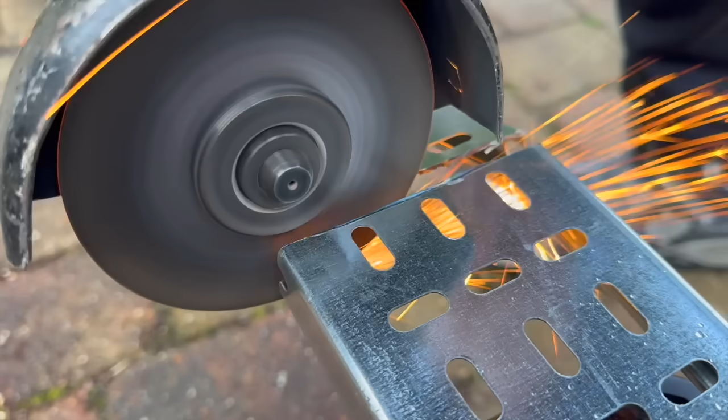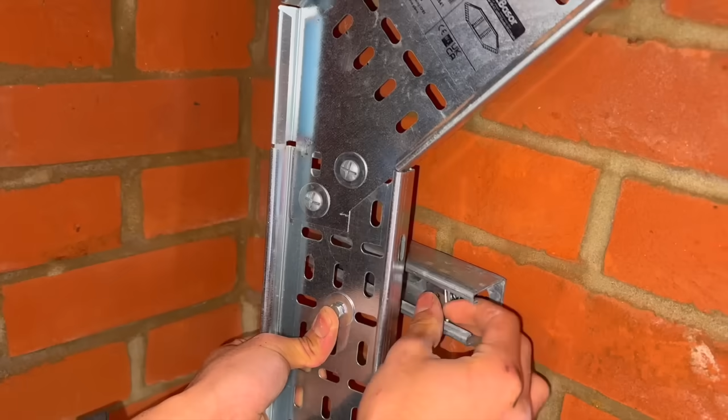Most electricians think cable tray is perforated so you can put cable ties through it. That's wrong. By the end of this video, you'll know the real reason and it will change how you think about every cable run you install. Today, we're taking a deep dive into cable tray, cable basket and cable ladder. What each one's actually for, where you'd use it, and the manufacturer's data that keeps you out of trouble.

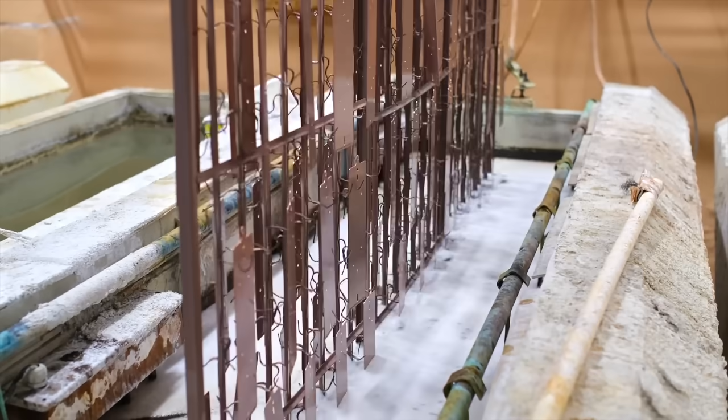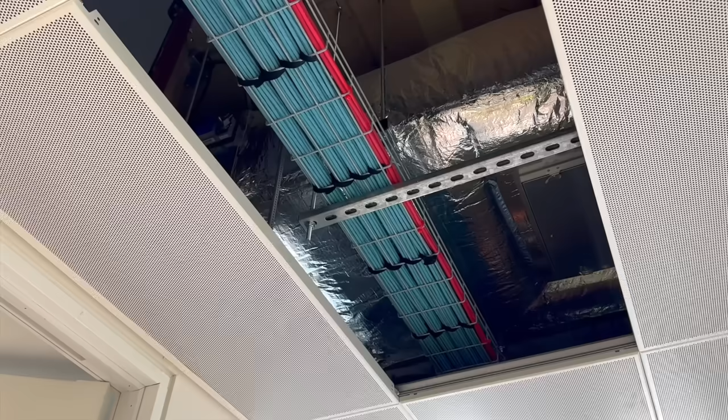One of the reasons cable tray has been so widely used is because of its versatility and that it can be supported in several different ways depending on the building and the application. In a corridor or plant room, you may find tray mounted directly to the wall using cantilever brackets. Above a suspended ceiling, it may be suspended from threaded rod using a trapeze arrangement. In industrial environments, it may be mounted directly to steelwork. And in most bougie coffee shops, you'll normally find it exposed for the whole world to see.

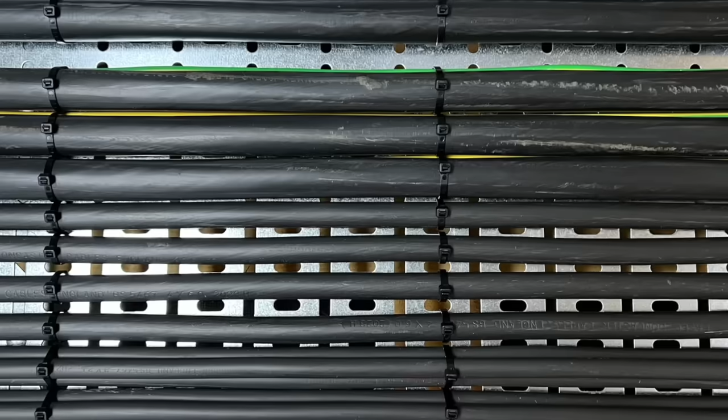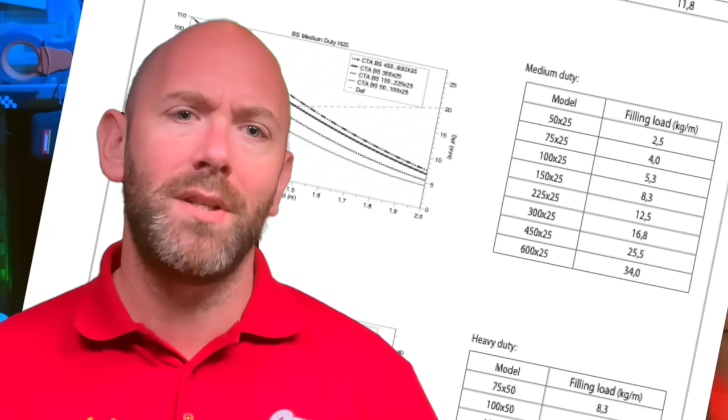The containment itself is only one part of the installation. The support system is equally important, and that's why we have to think about loading. When people first look at a cable tray datasheet, they tend to focus on the width. How many cables can I physically fit onto it? But manufacturers are more interested in something else: how much weight that tray can support. Let's take a 150mm medium duty tray as an example. If we look at the manufacturer's data, it has a published filling load of 5.3 kilograms per meter. At first glance, that doesn't sound like much, but what does it actually mean?

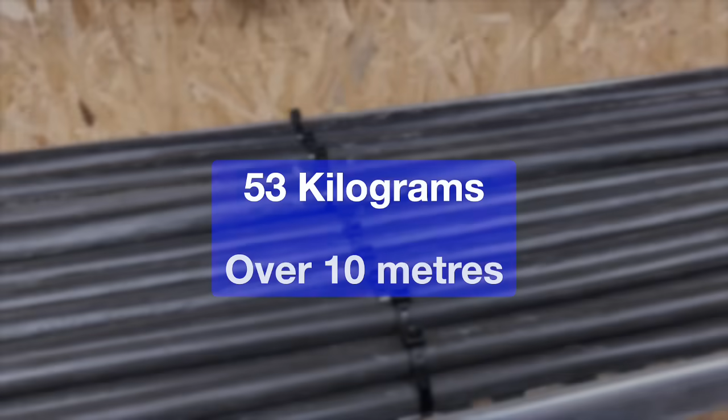Imagine we install 10 meters of that tray. The tray itself is now capable of supporting approximately 53 kilograms of cable load distributed along that length. Now let's put some real cables onto it. A typical 4-core 25mm squared steel wire armoured weighs somewhere around 1.9 kilograms per meter, depending on the manufacturer. If we install 2 of those cables, we've already used about 3.8 kilograms of our available 5.3 kilograms per meter. Add another one and we're at 5.7 kilograms per meter. We've exceeded the published filling load of that tray. Suddenly the loading figure starts to become very relevant.

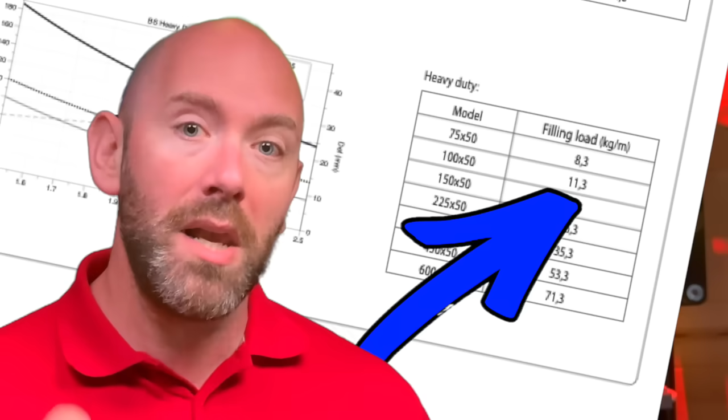Now let's compare that with a heavy duty version of the same 100mm tray. The width hasn't changed, the tray is still 100mm wide, but the filling load increases to 11.3 kilograms per meter. The same tray width can now support almost twice the cable weight. That extra capacity comes from the changes to the profile of the tray itself. The side flanges are deeper and the construction is stronger, allowing it to resist bending under greater loads.

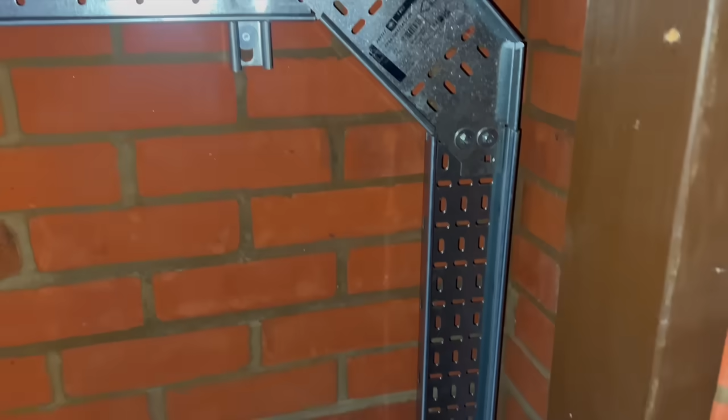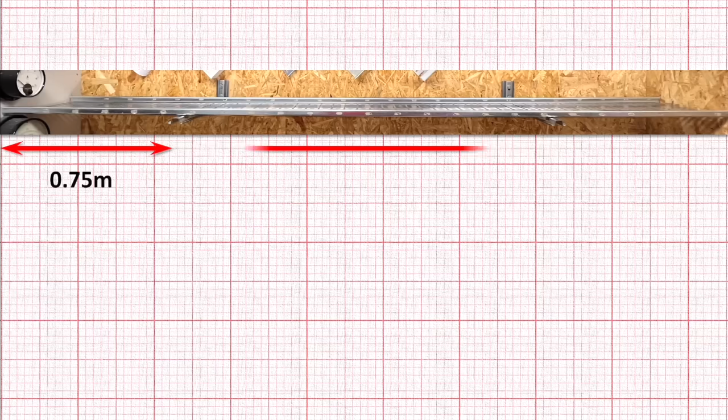But loading is only part of the story. The support spacings matter just as much. Imagine placing 2 ladders on the floor and laying a scaffold board between them. Move the ladders closer together and the board feels solid. Move them further apart and the board starts to flex. Cable tray behaves in exactly the same way. As the distance between the supports increases, the bending force increases. The tray deflects more and the carrying capability reduces. This is why manufacturers publish load information alongside support recommendations.

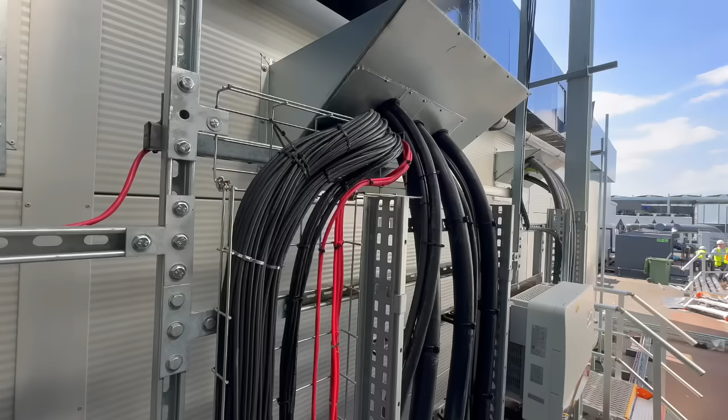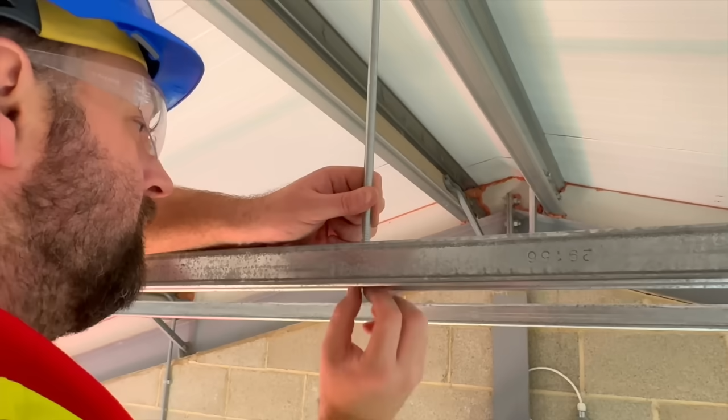And when you start looking at larger installations carrying multiple submains, distribution circuits and large steel wire armoured cables, understanding those loading figures becomes essential rather than optional. What often catches people out is that the tray might not be the limiting factor at all. The bracket may reach its limits first, the threaded rod might reach its limit first, or the fixing anchoring everything back to the structure may become the weakest point in that installation. So when we talk about containment loading, we're really talking about the entire support system working together. Now while we're looking at the tray itself, there is another detail worth mentioning: the perforations.

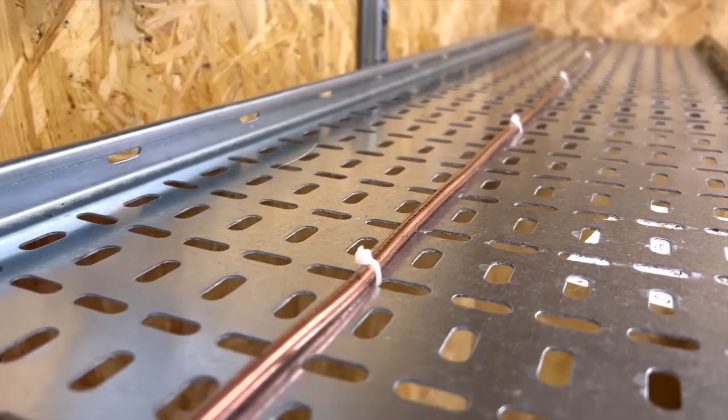Most people assume those holes are there simply for cable ties, and while they are very handy for that purpose, that's not exactly why they exist. We'll come back to those a little later because their real purpose tells us quite a lot about how cable tray is engineered.

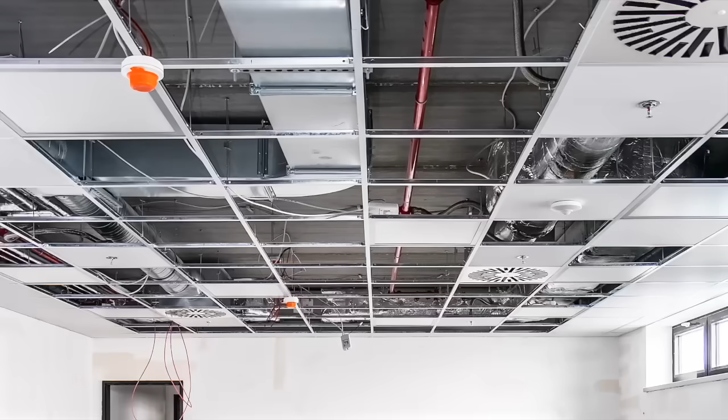You're on a job where the design changes every fortnight. Rooms move, services shift, and that's where basket wins. Not because it's stronger, but because it was engineered for exactly that chaos.

Now at first glance, cable basket looks like a lighter version of cable tray. Both support cables, both can be mounted on walls, ceilings and steelwork. Both can be suspended on threaded rod or trapeze systems, and both are commonly found in commercial and industrial buildings. But basket was designed with a different objective in mind. Where tray evolved around providing a continuous support surface for cables, basket evolved around installation speed and flexibility.

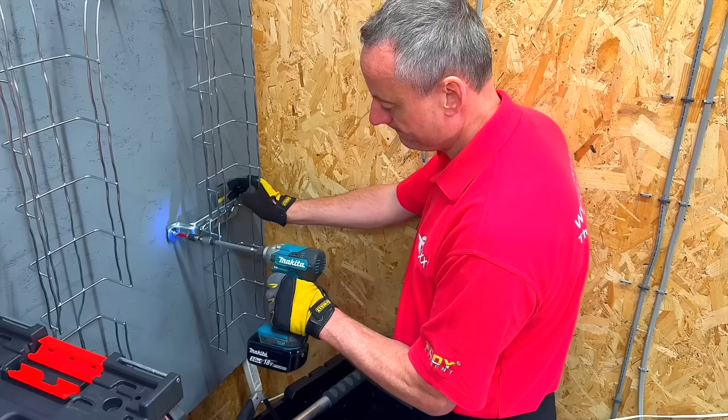You can see that immediately in the construction. Rather than a solid perforated base, basket uses a welded steel wire structure. That open structure brings several advantages. The first is speed of installation. If you've ever worked with basket on site, you'll know that it can often be cut, shaped and modified without needing a large range of dedicated fixings.

Changes in direction can frequently be formed directly from the basket itself. Drops into panels can be created on site. Tees and offsets can often be produced from a straight section. That flexibility in basket makes it particularly attractive in environments where layouts change regularly.

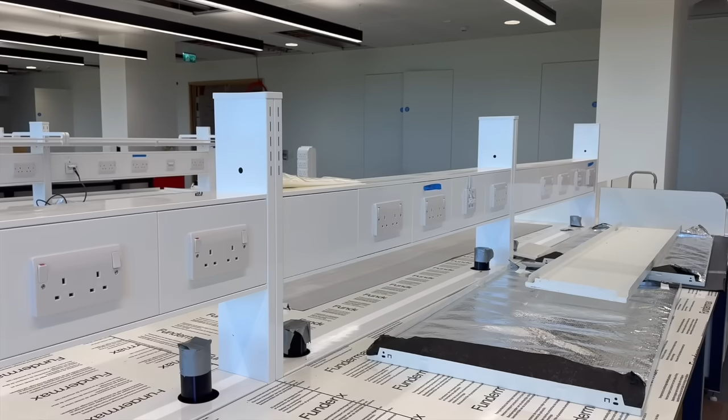Office fit-outs are a good example. The building may be reconfigured several times throughout its life. Departments move, new desks appear, additional data points are installed, security systems are upgraded. In those situations, the containment needs to be adaptable, and basket allows additional cables to be installed, removed, or rerouted with relatively little disruption.

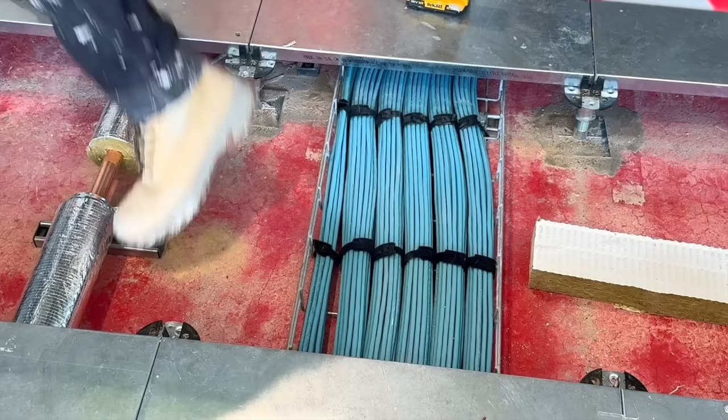The open wire structure also makes visual inspection much easier. You can immediately see what is installed and where it is going. Ventilation around the cable is also improved because the cables are not sitting on a continuous steel base. That doesn't necessarily mean the cables will carry more current, as current carrying capacity is determined by several factors, but it does mean heat can dissipate more freely around the cable installation.

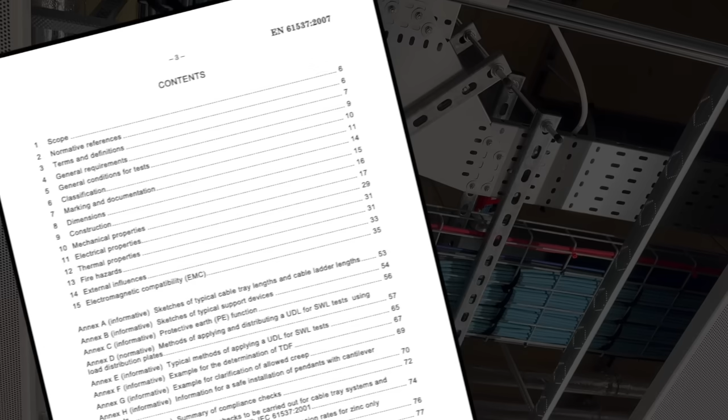Now, one assumption that is often made is that basket must be weaker than tray, but once we start looking at the manufacturer's data, things become more interesting. Just like tray, basket systems are designed and tested in accordance with recognized standards and are supplied with loading information and support span recommendations. If we take a typical 100mm wide by 65mm deep basket as an example, the published load carrying capability changes significantly depending on the support spacing.

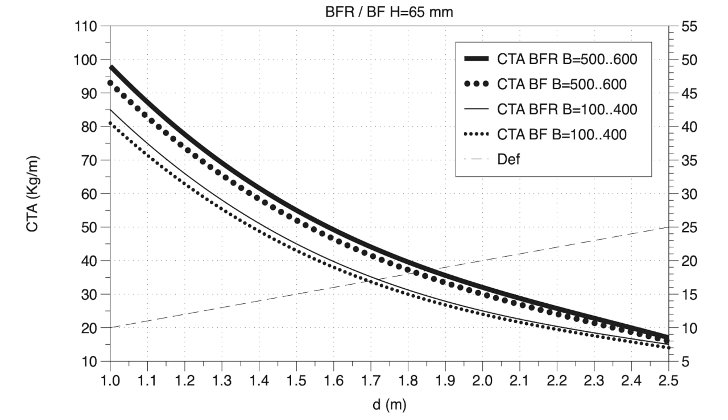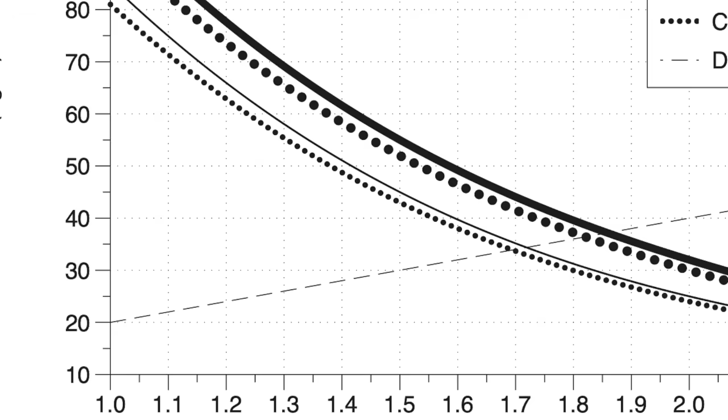At support centers of approximately 1 meter, the basket can support close to 90 kilograms per meter. Increase the support spacings towards 2 meters and that figure falls to around 30 kilograms per meter. The basket hasn't changed, the steel hasn't changed, the width hasn't changed. The only thing that has changed is that distance between the supports.

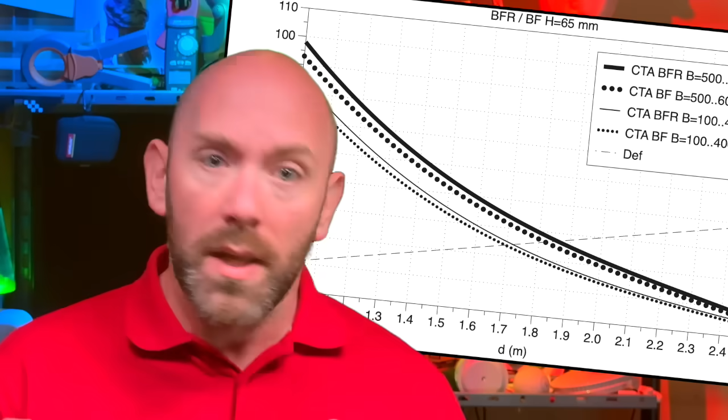This illustrates an important point that applies to all containment systems. The loading figure and the support span are linked together. This is why manufacturers publish graphs and loading tables rather than a single headline figure. But they do highlight an important fact. Basket is not simply a lightweight alternative to tray. It is a fully engineered containment system with its own design criteria.

Where basket can begin to lose ground is where we start introducing large quantities of heavy power cables, multiple steel-wired armoured submains, large distribution circuits, industrial power installations.

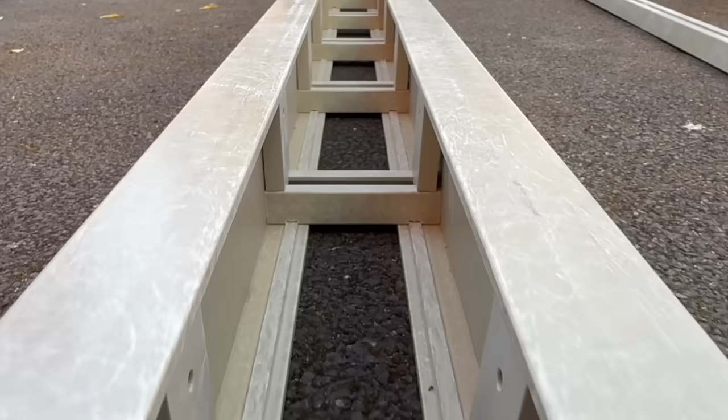Cable ladder is where containment starts to become a structural support system rather than simply a method of routing cables. If you walk through a modern office building, you'll often find basket carrying data cabling and small power circuits because flexibility and future modifications are usually the priority.

Walk through a factory, a data center, a power station, or a large industrial installation, and the priorities start to change. The cable size increases, the cable weights increase, the distances increase. And very quickly, the challenge becomes one of supporting substantial loads safely over long spans. That's exactly why ladder was developed.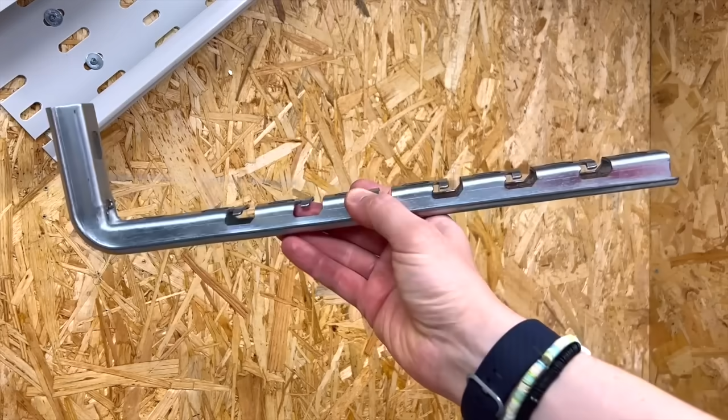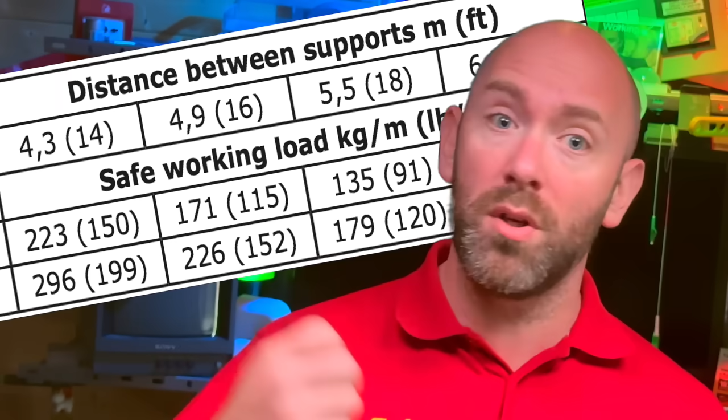The easiest way to understand the difference is to look at the support distances. When we discussed basket, we were looking at support centers typically around 1 to 2 meters apart. With ladder, those distances become much larger. If we take a typical ladder with a 125mm side rail, it can support 223 kilograms per meter with support centers spaced 4.3 meters apart. Increase the side rail height to 150 millimeters and that rises to 296 kilograms per meter.

Think about what that actually means. A 10-meter run of ladder could be supporting well over 2 tons of cable load while only requiring support points every 4 meters. That is a completely different engineering problem from supporting a handful of circuits above a suspended ceiling.

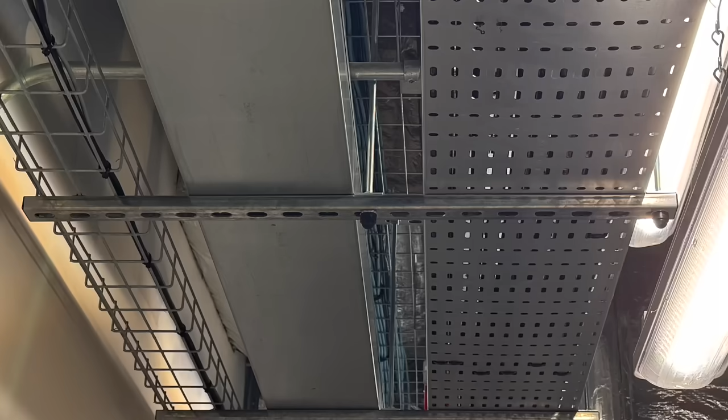Unlike tray, which spreads materials across the base, ladder concentrates its strength into the side rails. Those side rails do most of the structural work, while the rungs support the cable at regular intervals. The result is a containment system that is both strong and relatively efficient in terms of material usage. Another benefit is ventilation. The open rung design allows air to circulate freely around the cable, and that becomes increasingly useful as cable sizes and currents increase because larger cables inevitably generate more heat.

But by now you do know the drill. Loading and span are married. What changes on ladder is the scale of the consequence when you get it wrong. The brackets, steelwork, threaded rod and fixings all become part of that design calculation. If any one of those components is undersized, it can become the limiting factor regardless of how strong the ladder itself might be. The environment also starts to become more important as installations become larger and more exposed.

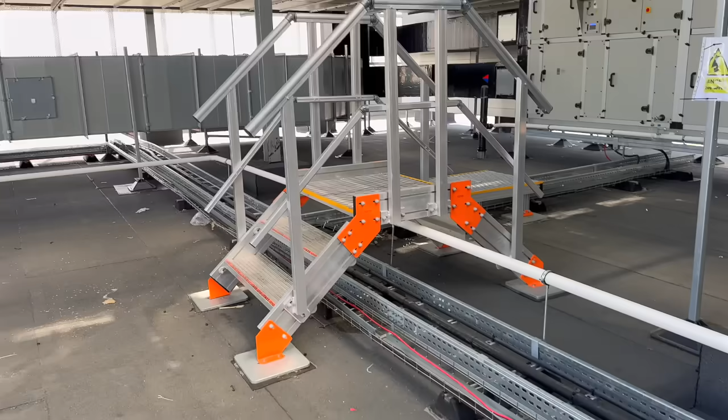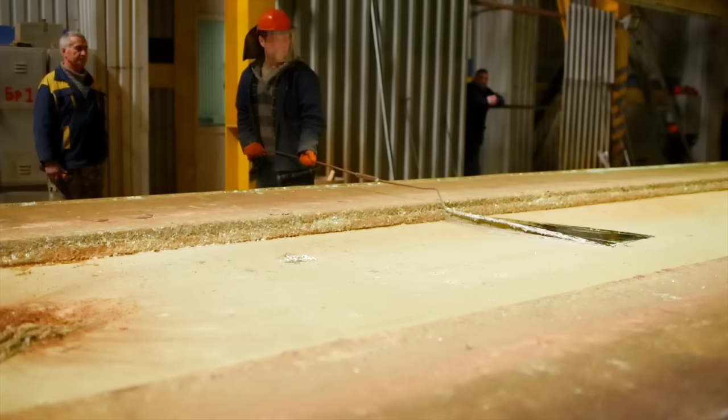A ladder installed inside a dry building may perform perfectly well with a pre-galvanized finish, but place that same containment outside on a factory roof and the situation changes considerably. The containment is now exposed to rain, condensation, temperature cycling and airborne contaminants for decades. This is why manufacturers offer different finishes and materials. Hot dip galvanized systems provide a much thicker protective coating for external installations, while stainless steel and GRP systems become attractive where corrosion resistance becomes a primary design consideration.

And this really brings us back to the central theme of this whole video. Tray, basket and ladder are not competing products. They are different engineering solutions designed around different installation requirements.

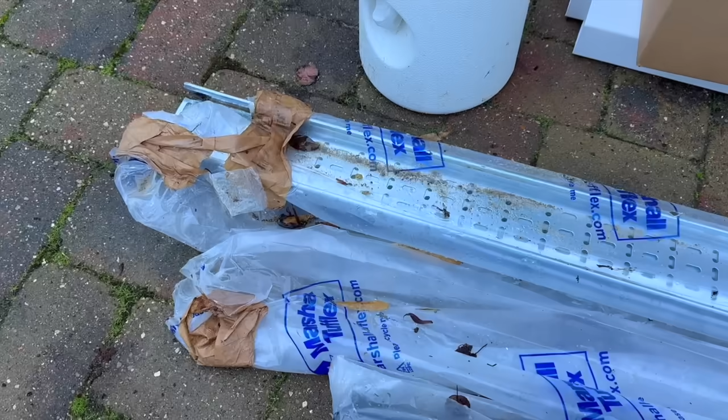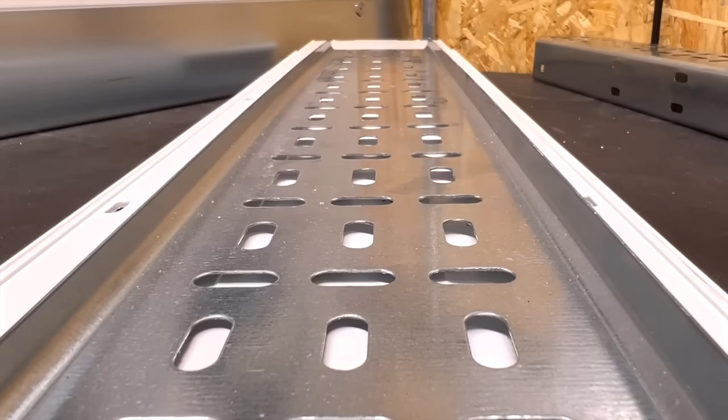But before we finish, let's get back to those holes. Are they really there for your cable ties? Well, yes and no. You can absolutely use them for cable ties. You can use them for fixing accessories, but that isn't why they exist. The perforations are actually part of the engineering of the tray itself. They reduce the amount of material required to manufacture the containment while maintaining much of its structural performance. They reduce weight, making the tray easier to transport and install. They improve ventilation around the cables, and they allow water to drain rather than collecting within the containment.